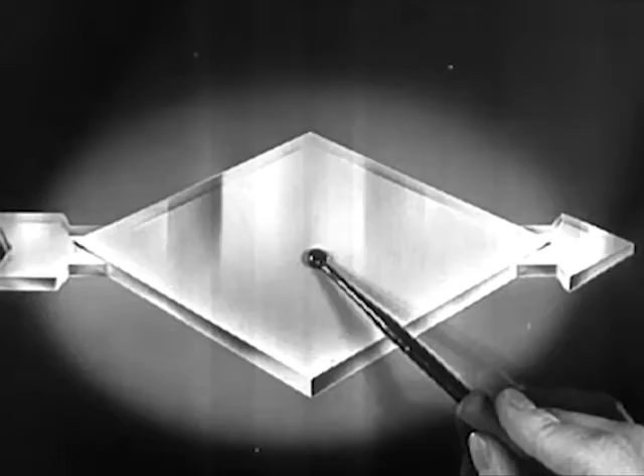Flash of power, the gleam of oil. In the sky, the power of oil conquering the heights. On the sea, the might of petroleum pulsing in great engines of the liners that traverse the deep. On land, oil feeds the fiery furnace or drives the diesel engines along far-flung rails of steel. And on the open road, well, you know what makes your auto run.

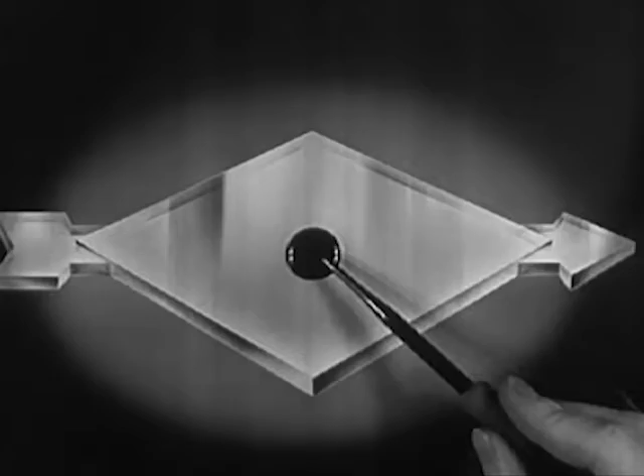For millions of years, this source of power slept peacefully in the dark recesses of the earth until modern magic loosed the liquid energy from its subterranean prison. Great areas became forests of towering derricks. And here's how the petroleum forest grows.

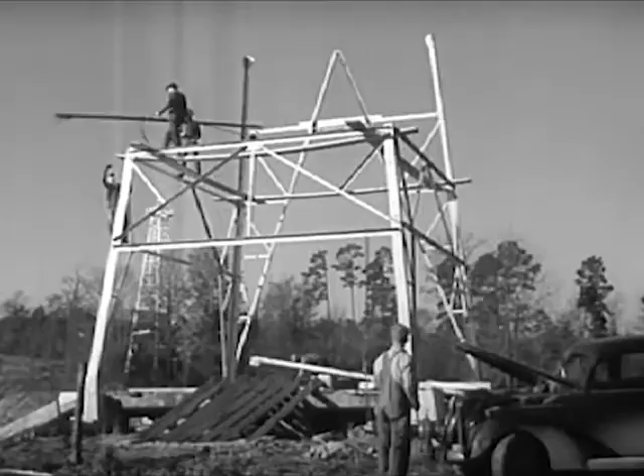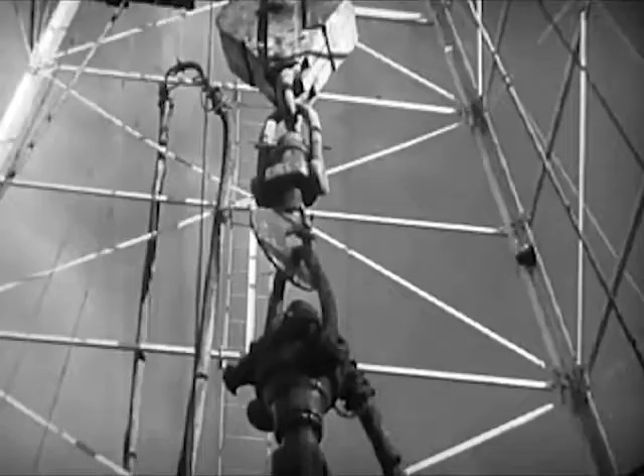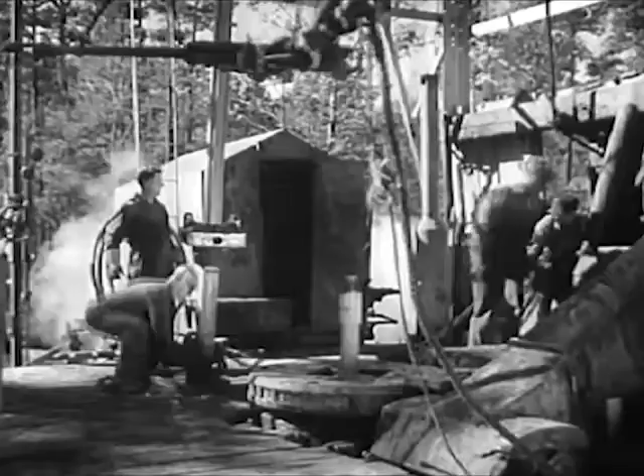A cellar is dug, and a rotary table to turn the drilling stem and the bit is set in place. Round and round the rotary goes, drilling deep down to oil. A steam engine drives the drilling mechanism. They're inserting a length of pipe, lengthening out the stem for deeper drilling. A new joint is waiting.

Oil field workers are called drillers, roughnecks, roustabouts, rope chokers. The oil field treats our ears to odd and colorful names. Now the drilling stem has been lengthened, then round and round once more.

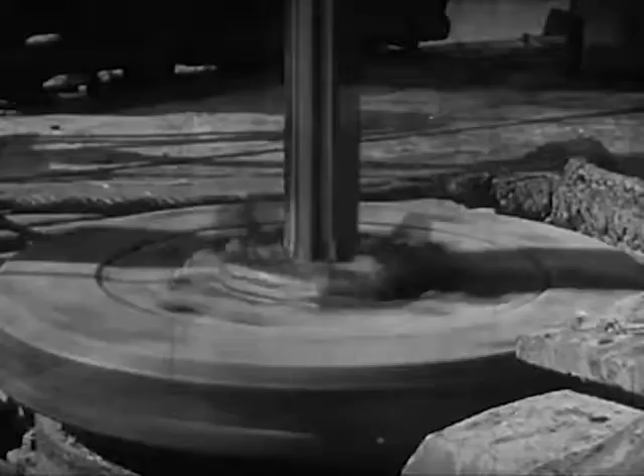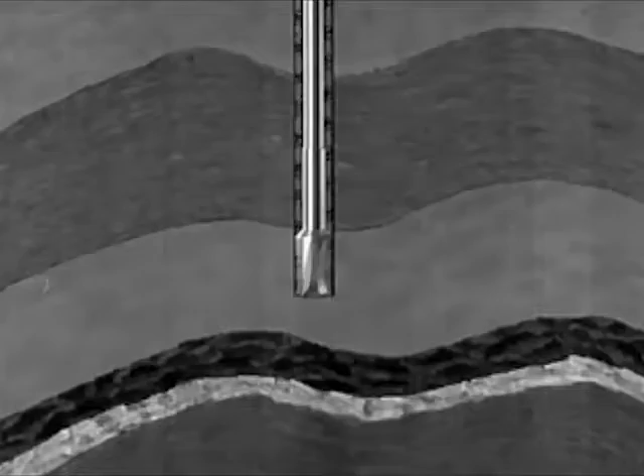Down through layers of sandstone, shale, limestone, down to astonishing depths. This well 5,000 feet. Some 10,000, 2 miles into the earth. And then, after weeks of drilling, fighting against natural obstacles, the drill at last reaches the oil sand, porous rock, which holds the oil much as a sponge holds water.

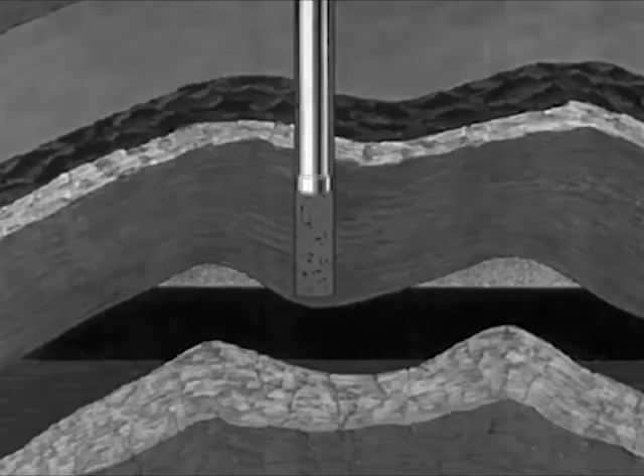Next, the casing is lowered to the bottom of the hole and cemented in position. Then drilled through the oil sand, and a screen is installed at the base of the casing. The screen extends down into the oil sand. The oil flows through the screen, up through the small pipe tubing to the surface.

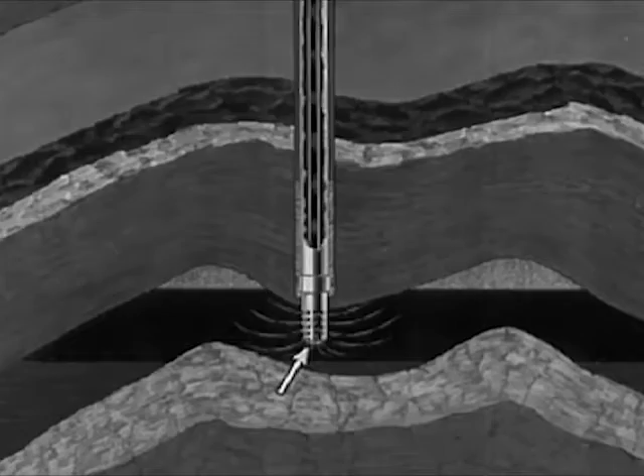So they've struck oil, and now the well must be cleaned of the mixture of drill mud and oil. Some wells flow of their own pressure. Others must be pumped, need power.

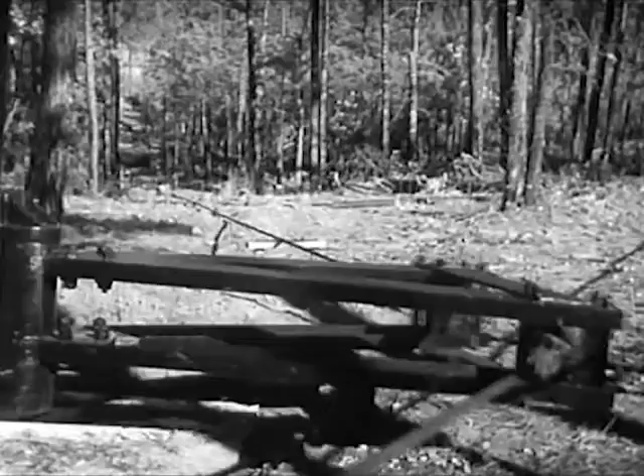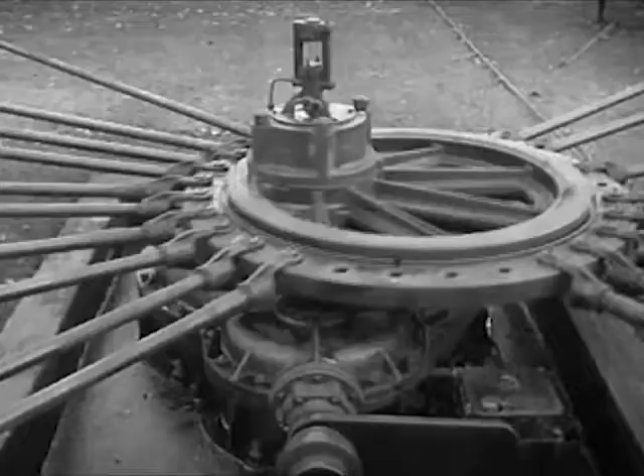The power is transmitted to groups of wells, the ever-swaying rocker arm, the rhythm of pumping, the unceasing heartbeat of the oil fields. A 24-well hookup is the height of oil field power, pumping black magic from 24 drillings in the earth, all at the same time, out of the ground.

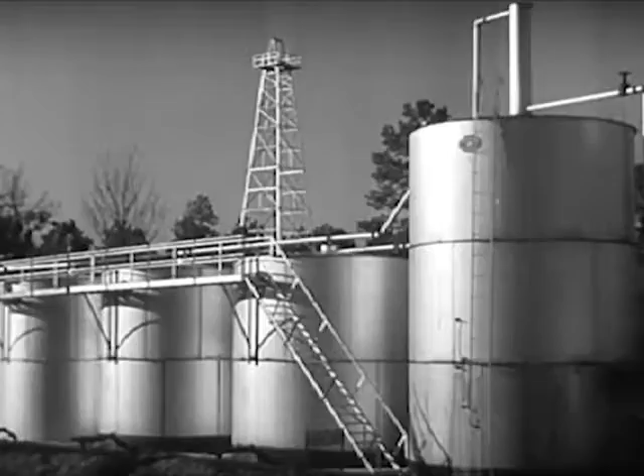The oil is cleaned of natural gas or water, which is combined with it. Next, the petroleum starts on its way through a great network of pipelines. There are powerful pumping stations every 40 or 50 miles to keep it moving along the lines.

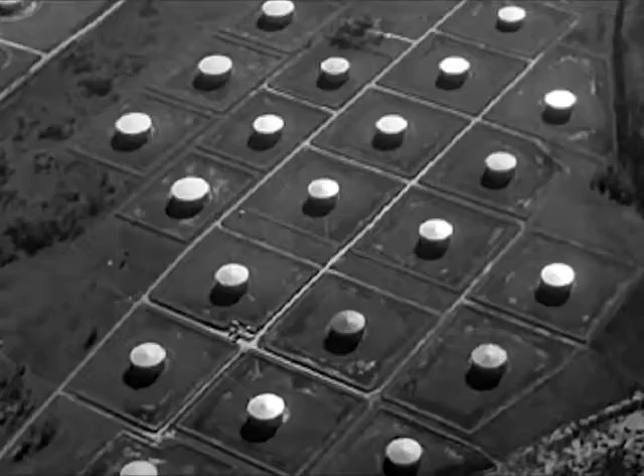The lines of pipe, alive with racing oil, run through forests and over plains to these silver discs. They're storage tanks where the oil rests briefly before it rides the waves in giant tankers. And they're masterpieces of shipbuilding, those tankers of steel. The largest navigate the sea at 15 knots and carry 5.5 million gallons of oil.

The voyage of oil to the refineries. The refinery with its modern structures, technological towers, minarets of science, docks, office buildings, pageant of industry.

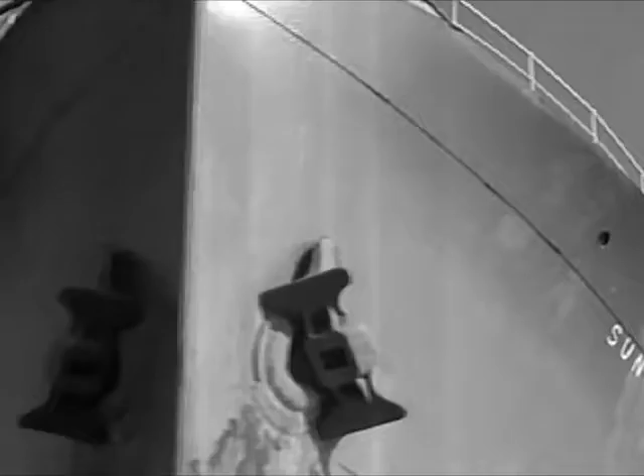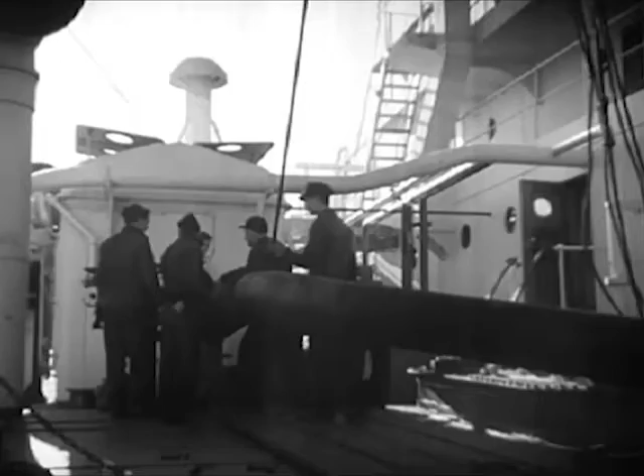Day after day, there is an endless flow of oil as the tankers discharge their liquid cargo. Unloading oil is a vast operation of piping through huge hoses. Discharge pipes on the vessel and receiving lines on the dock are connected, and a cargo of 5 million gallons is discharged in less than 24 hours.

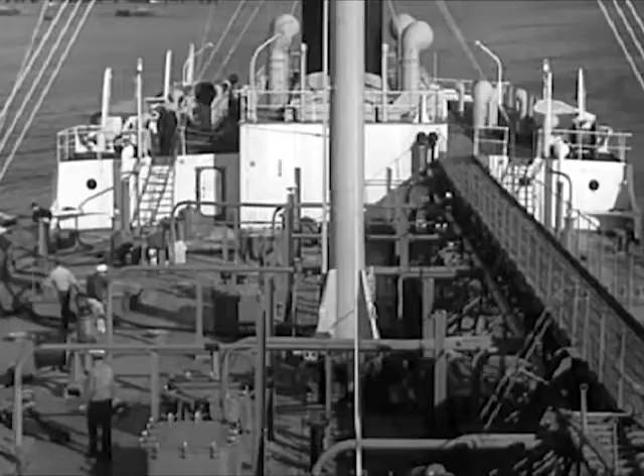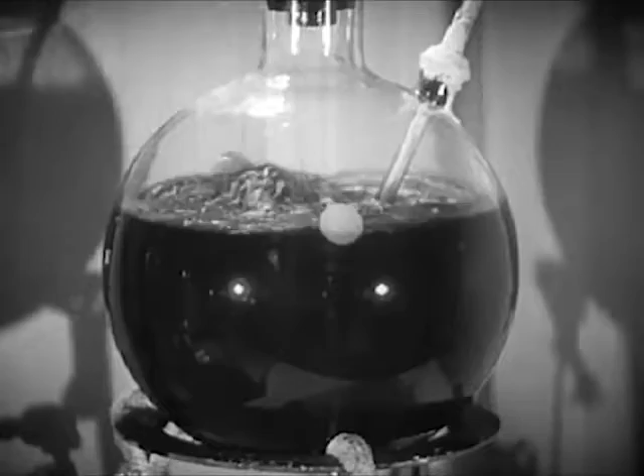No two cargoes of crude oil are alike, so each boatload must be stored in different tanks, and each batch must be processed individually, with laboratory tests to indicate the precise treatment for each.

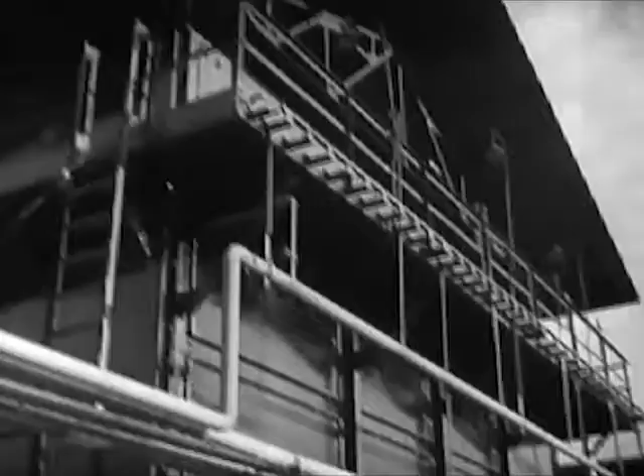That is embodied science. Those masses of strangely wrought steel, forests of stacks, glowering and hissing boilers, leaping and winking fireboxes. Intense heat, the flames roar in the furnace, yet the oil flows so fast the heat does not scorch it. And scientists wrest from the crude petroleum its tremendous power in the form of gasoline and other fuel oils.

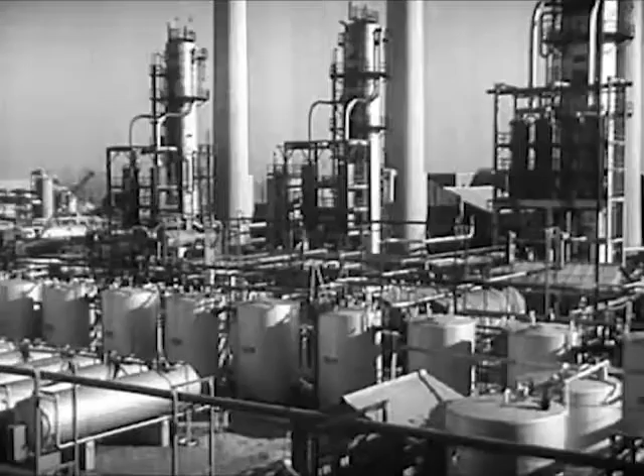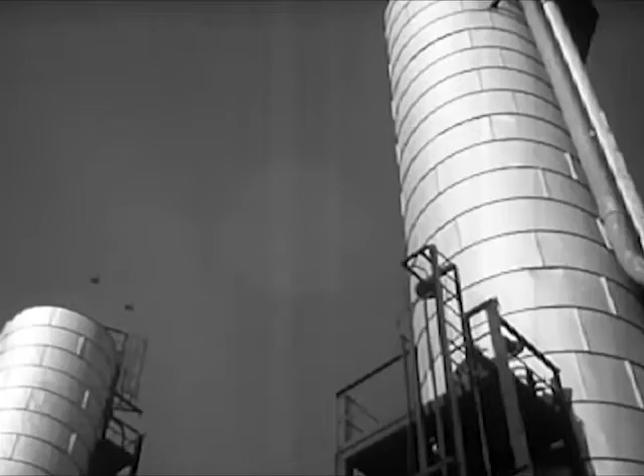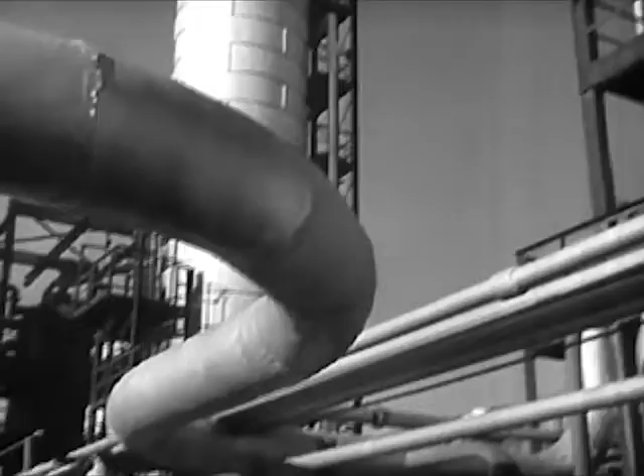And that's done in these towers called fractionating towers. They divide crude oil into the lighter and heavier parts. Those of different boiling points liquefy at different levels in the towers. Some lighter than gasoline liquefy at the top. Heavier parts liquefy further down. At the bottom are the heavy fuel oils, or the raw materials from which lubricating oils are made.

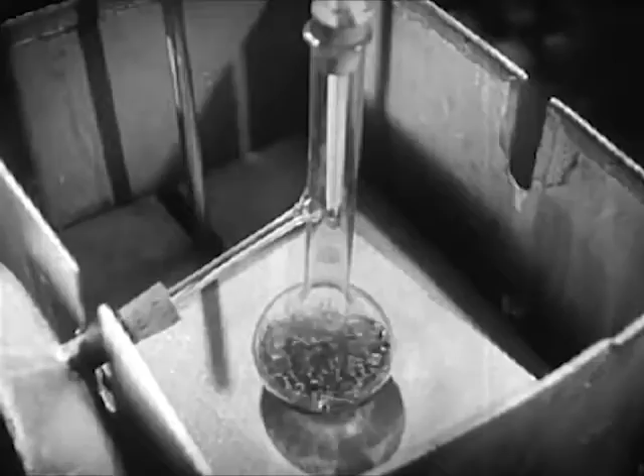When increasing use of motor cars pyramided the demand for gasoline to extraordinary heights, scientists were called upon to devise new methods. How could a greater proportion of gasoline be extracted from the crude oil than that obtained from the fractionating tower alone? To meet this challenge, the scientists turned to products other than gasoline which are drawn from the crude, studied their molecules, and found a way to change them, to turn them into gasoline.

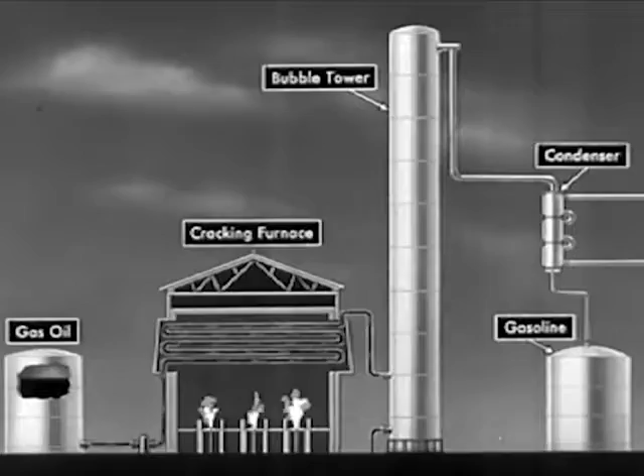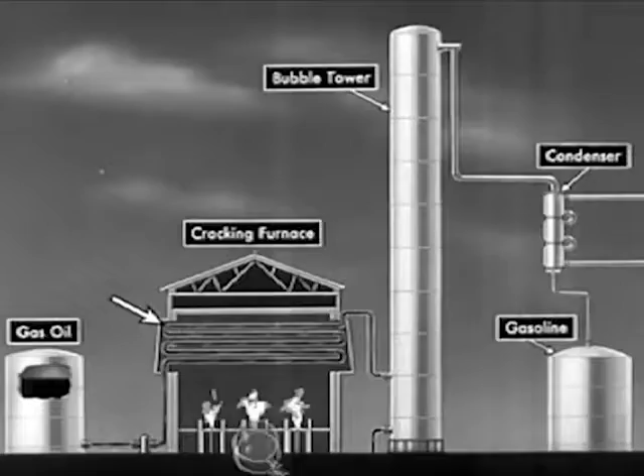The result was cracking. Let's look at a diagram of a cracking plant. Here we see how one part of petroleum that is not gasoline is converted into gasoline. Called gas oil, it is pumped through a pipe into a cracking furnace, heated to over 900 degrees under tremendous pressure. And the individual particles, molecules, are broken into smaller molecules, just as coal is broken under a hammer.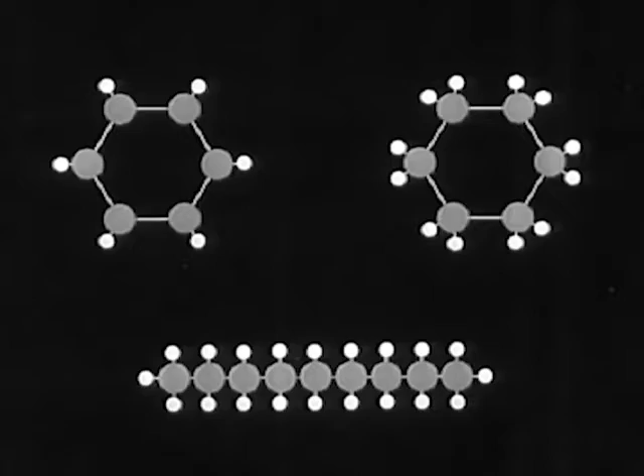If we could see one of those molecules, it would look something like this. The hotter the molecule gets, the faster it wiggles, until finally it wiggles so fast it flies apart. The pieces shoot around at great speeds. They eventually find partners and form new and smaller molecules that look something like this. These smaller molecules are now no longer gas oil, but are gasoline of high-powered, knockless quality.

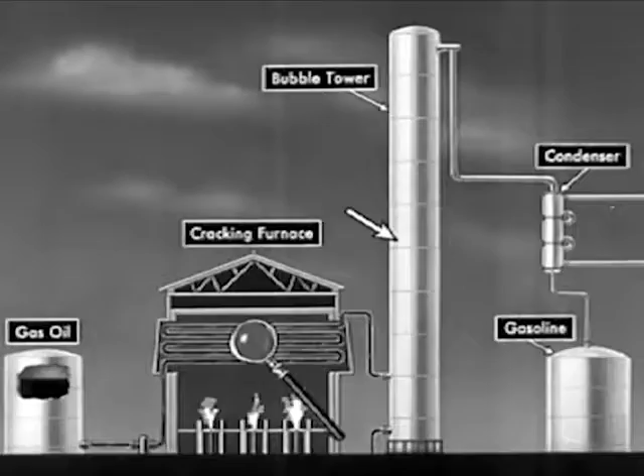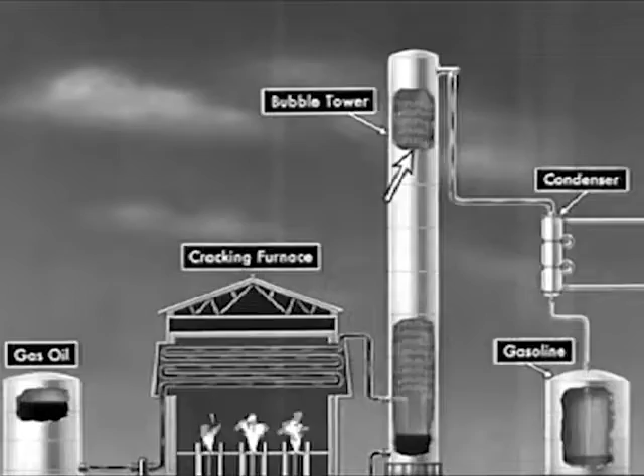Some of the gas oil molecules do not fly apart and must be separated from the gasoline. This is done in the bubble tower. Here the big molecules, which are not gasoline, are held back and come out at the bottom as a liquid. The gasoline goes up the tower as a vapor, comes out at the top, and is condensed into liquid gasoline. Gasoline that gives more power to you.

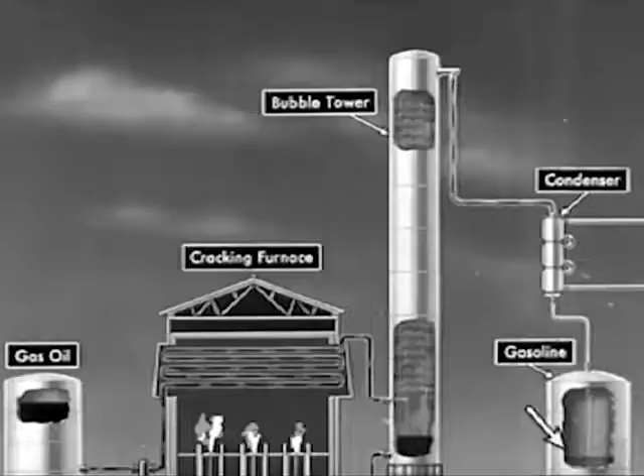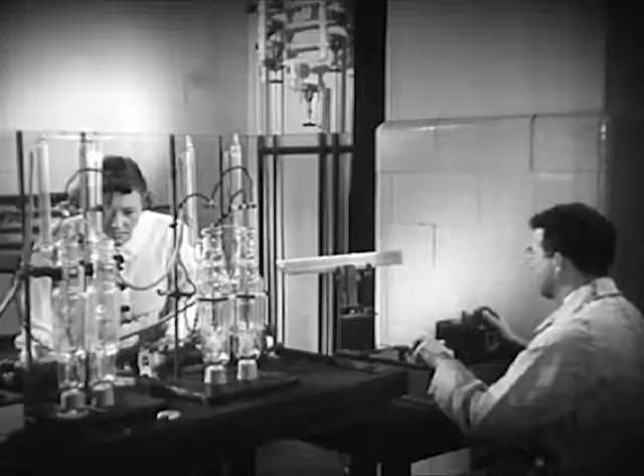The laboratory with its strange gleaming of new and unpredictable things. Here are created modern miracles with the chemistry of oil.

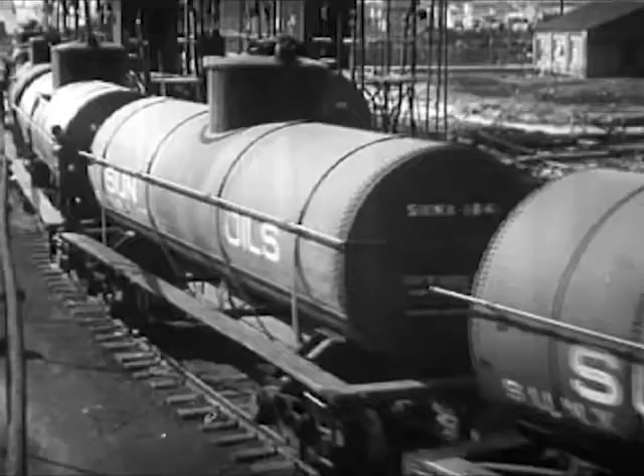Tank farm, to which the motor fuel goes from the refinery, and then out to the nation, by railroad tank car and by motor barge. Pipelines run their web-like nets under rivers, over mountains, carrying gasoline that goes into millions of gasoline tanks to generate billions of horsepower for the nation.

Oil means horsepower in a horsepower-using world. Briefly, in 4 words, more power to you.